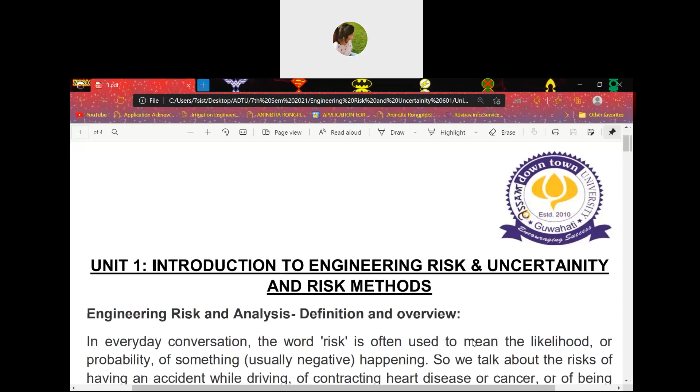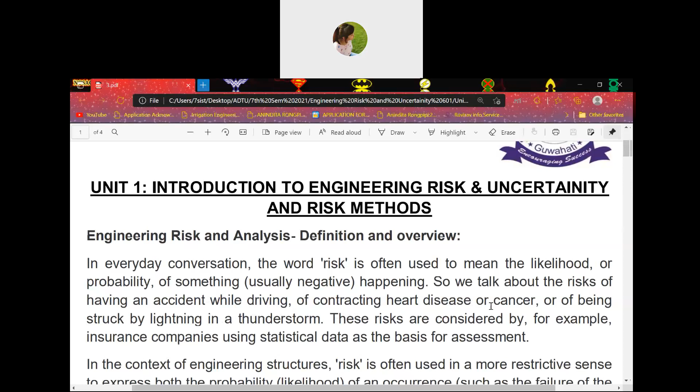In everyday conversation, the word risk is often used to mean the likelihood or probability of something negative happening. For example, the risk of having an accident while driving, of contracting heart disease or cancer, or of being struck by lightning in a thunderstorm. These are negative happenings when it comes to the word risk.

These risks are considered by, for example, insurance companies using statistical data as the basis of assessment.

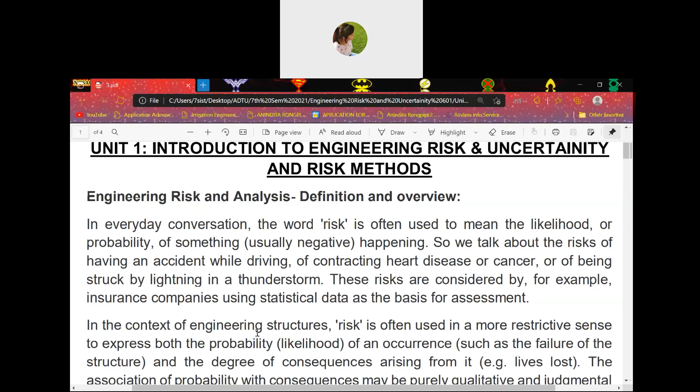In the context of engineering structures, risk is often used in a more restrictive sense to express both the probability, that is the likelihood of an occurrence such as the failure of the structure, and the degree of consequences or results arising from it, for example, lives that have been lost.

The association of probability with consequences may be purely qualitative and judgmental, using terms like high, medium, and low, and this may be useful in assessing relative risk.

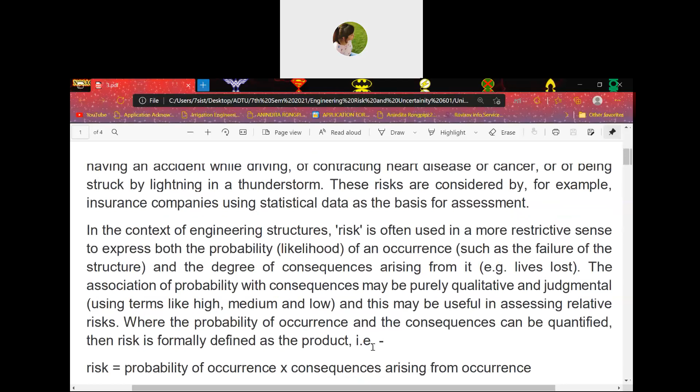Where the probability of occurrence and the consequences can be quantified, risk is formally defined as the product, that is, risk equals probability of occurrence multiplied by consequences arising from the occurrence. So, from an engineering point of view,

risk is used in a more restrictive way, to express probability, meaning likelihood, and occurrence, meaning an event that has already occurred. Here the example cited is the failure of a structure, since we are talking about engineering structures, and also the degree of consequences arising from it, that is the result of the consequences arising from the occurrence. For example, when a structure fails, the consequence is that lives are lost.

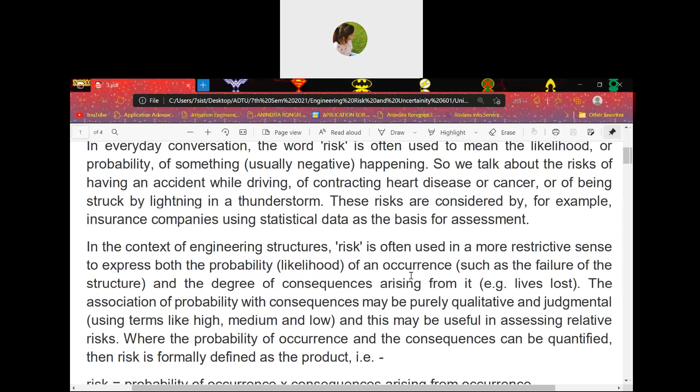So the association, that is the connection, of probability with results, that is consequences, is purely qualitative and judgmental, for we use terms like high, medium, and low. This qualitative and judgmental relation between probability and consequences is useful in assessing or determining relative risk, that is, basic risk.

Where the probability of occurrence and the consequences can be quantified, when you can quantify both the results and the occurrences that took place, risk is defined as the product, which is defined here: risk equals probability of occurrence multiplied by consequences arising from occurrence. In simple terms, risk equals occurrence multiplied by results, that is, the outcome of the occurrence.

Buildings, bridges, chemical plants, and pipelines are usually built and maintained in accordance with standards and codes of practice that aim to achieve a certain target reliability, which is the probability of not failing. We all know that when bridges, buildings, chemical plants, and pipelines are built or maintained, they follow certain standards and building codes or practices. Why are these standards there? Because they aim to achieve target reliability, meaning the chances or probability of the structure not failing.

But failure of, say, a pipeline will have very different consequences for persons if it occurs in a crowded city where people may be injured, rather than in an unpopulated desert. If a pipeline is constructed in a crowded city, a failure will result in many lives lost. But if the same pipeline is constructed in an unpopulated desert, a failure would cause no injuries since no one is there.

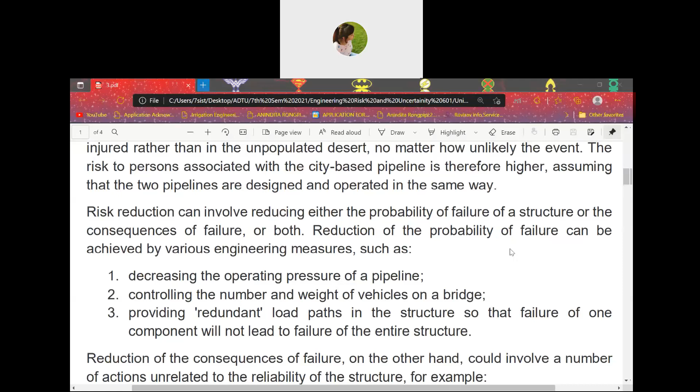Providing redundant load paths in the structure so that the failure of one component will not lead to the failure of the entire structure. Building a redundant, dummy load path in the structure means that when failure occurs in one component, the entire structure does not fail.

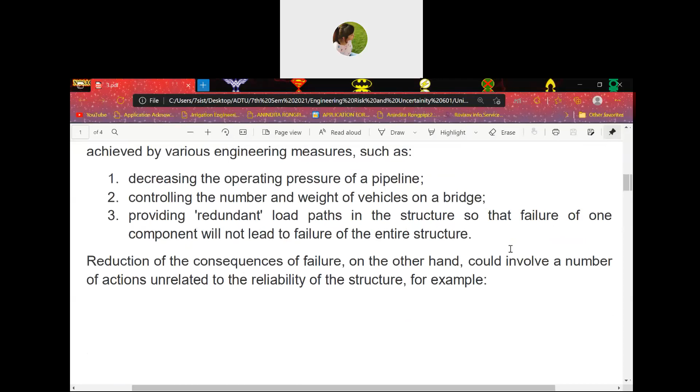Reduction of the consequences of failure, on the other hand, could involve a number of actions unrelated to the reliability of the structure.

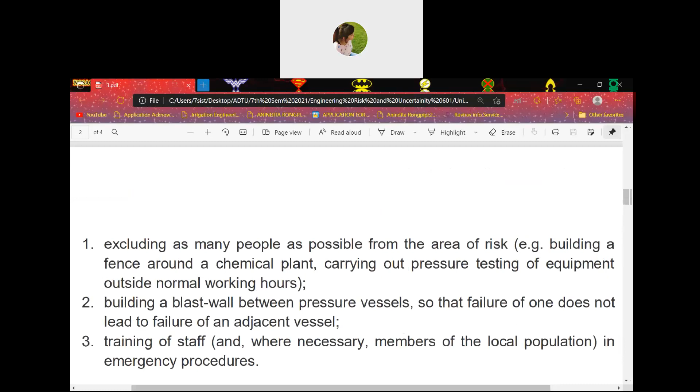For example, excluding as many people as possible from the area of risk, such as building a fence around a chemical plant, carrying out pressure testing of equipment outside normal working hours, building a blast wall between pressure vessels so that failure of one does not lead to the failure of an adjacent vessel, and training of staff, and where necessary, members of the local population, in emergency procedures.

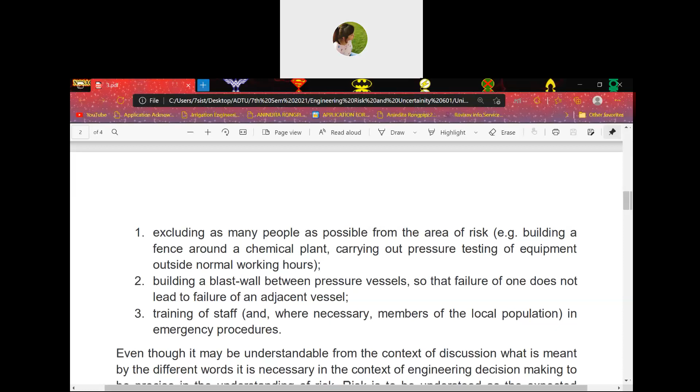Even though it may be understandable from the context of discussion what is meant by different words, it is necessary in engineering decision making to be precise in the understanding of risks. In general terms we may understand the term risk, but we should try to understand it more in the context of engineering decision making.

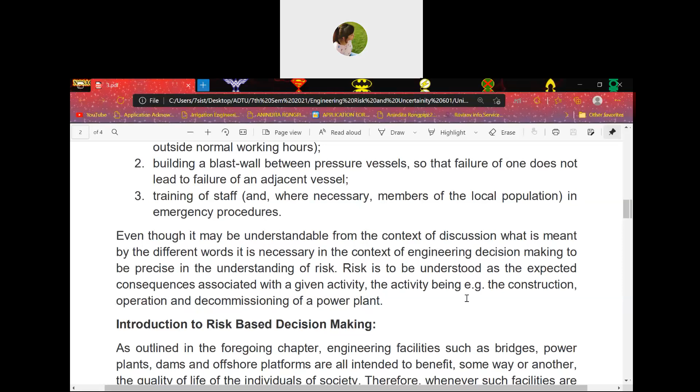Risk is to be understood as the expected consequences associated with a given activity. So how is risk understood? Risk can be understood as the expected results or consequences associated with a given activity. This activity can be a construction operation or the decommissioning of a power plant.

Next, introduction to risk-based decision making. As outlined in the previous discussions, engineering facilities such as bridges, power plants, dams, and offshore platforms are all intended to benefit in some way the quality of life of individuals of society. Therefore, whenever such facilities are planned, it is a prerequisite that the benefit of the facility can be proven considering all phases of the life of the facility, including design, manufacture, construction, operation, and eventually decommissioning.

So any engineering facility such as bridges, power plants, dams, and offshore platforms, if it is constructed, it is definitely intended for the benefit, in some way, as a contribution to the quality of life of the individuals of a society.

So when such facilities are planned or constructed, certain phases of the life of the facilities are considered. These phases include design, manufacture, construction, operation, and eventually decommissioning. If design, manufacture, construction, operation, and decommissioning are not included, then the facility should not even be established or planned.

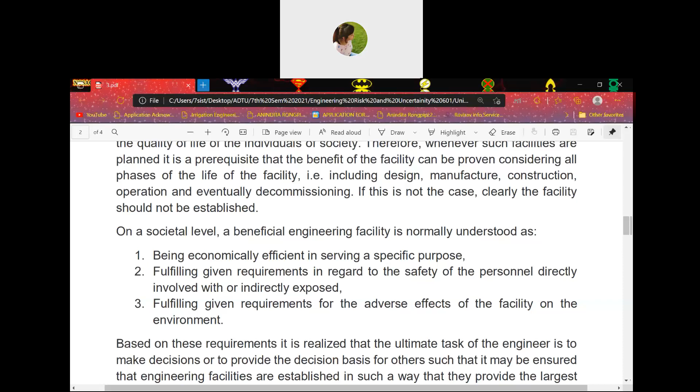It should also fulfill given requirements in regard to the safety of the personnel directly involved, and those indirectly exposed - that is, the safety of the laborers and all who are involved in the construction process - and fulfill given requirements regarding the adverse effects of the facility on the environment.

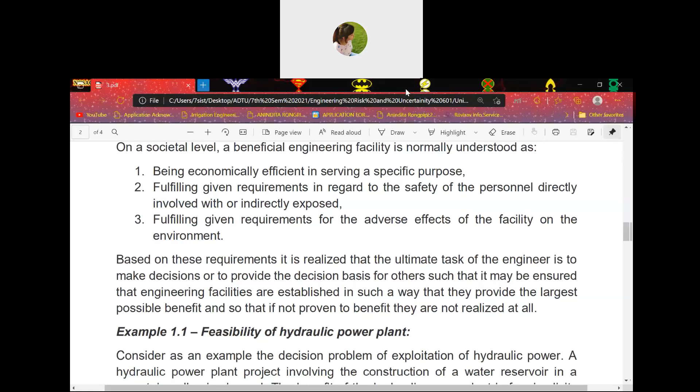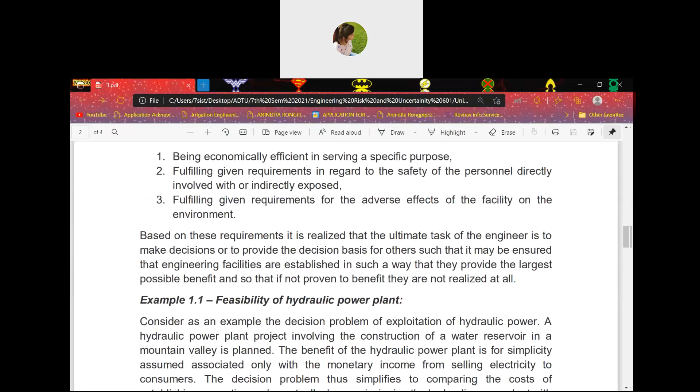Based on these requirements, it is realized that the ultimate task of an engineer is to make decisions, or to provide the decision basis for others, such that it may be ensured that engineering facilities are established in such a way that they provide the largest possible benefit, and so that if it is not proven to benefit, they are not realized at all.

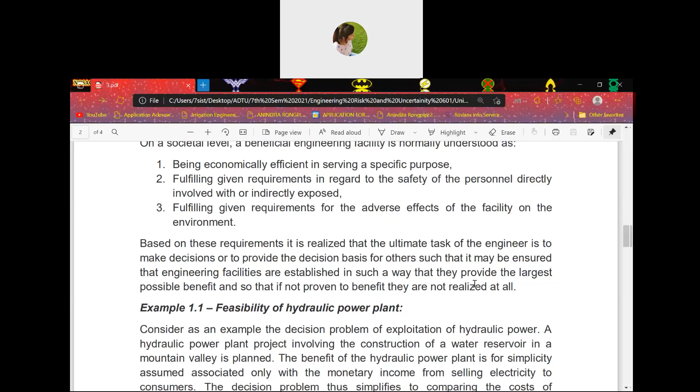Based on these three requirements, the ultimate task of any engineer is basically to make proper decisions. These decisions should mainly focus on the largest possible benefit of the facility. If the facility does not benefit, then it should not be realized by anyone. Even if it is not beneficial, it should not be realized. And if it is beneficial, then that is a very good thing.

The first example is the feasibility of a hydraulic power plant. Consider as an example the decision problem of exploitation of hydraulic power. A hydraulic power plant project involving construction of a water reservoir in a mountain valley is planned.

The benefit of the hydraulic power plant is, for simplicity, assumed to be associated only with the monetary income from selling electricity to consumers. So the decision problem thus simplifies to comparing the cost of establishing, operating, and eventually decommissioning the hydraulic power plant with the incomes to be expected during the service life of the plant.

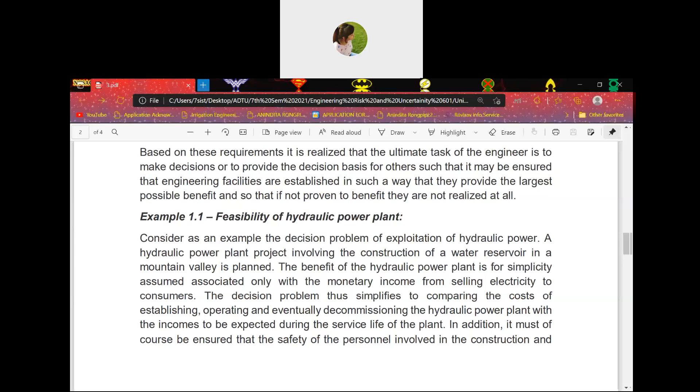The decision problem, in simple words, means to compare the cost of establishing, operating, and decommissioning the hydraulic power plant with the income you will receive during the service life of the power plant.

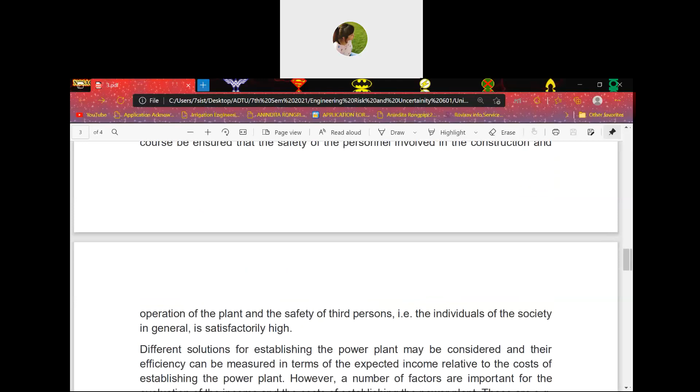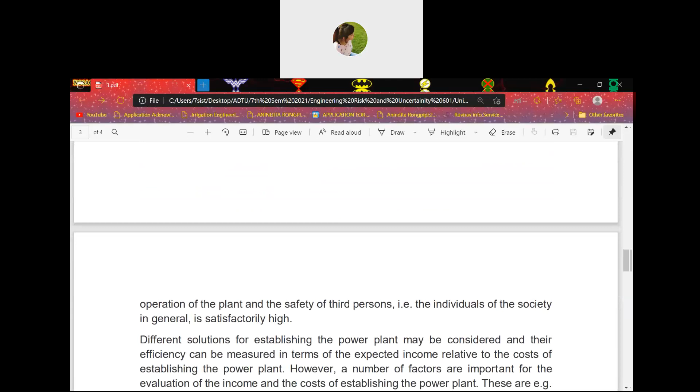In addition, it must be ensured that the safety of the persons involved in the construction and operation of the plant, and the safety of third persons, is satisfactory. The third point to consider is the safety of laborers or personnel involved in construction and operation, and also the safety of individuals of the society who live nearby, who are considered third persons.

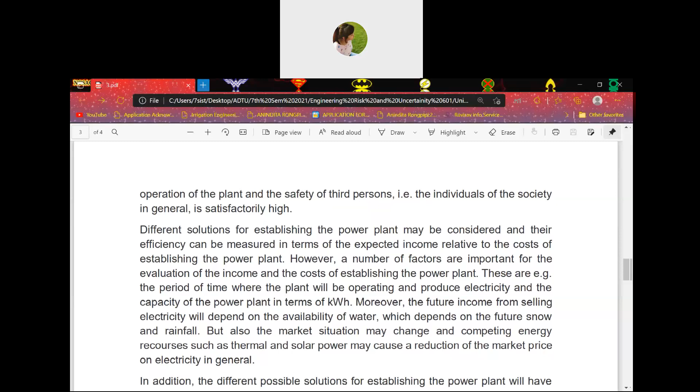Different solutions for establishing the power plant may be considered, and their efficiency can be measured in terms of the expected income relative to the cost of establishing the power plant. Efficiency may be determined in terms of the expected income or consumer income related to the cost of establishing the entire power plant.

However, a number of factors are important for the evaluation of the income and the cost of establishing the power plant. These include the period of time the plant will operate and produce electricity, and the capacity of the power plant in terms of kilowatt hours.

Moreover, the future income from selling electricity will depend on the availability of water, which in turn depends on future snow and rainfall predictions.

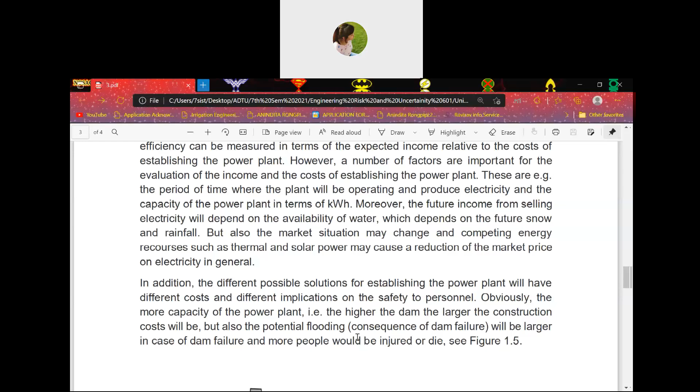The market situation may also change, and competing energy resources such as thermal and solar power may cause a reduction in the market price of electricity. These ongoing or competing energy resources, like thermal or solar power plants, may reduce the consumer price of electricity.

In addition, the different possible solutions for establishing the power plant will have different costs and different implications on the safety of the personnel.

Obviously, the more capacity the power plant has, the higher the dam, the larger the construction cost will be. But also the potential flooding consequence of dam failure will be larger. When the dam is higher and construction cost is larger, the probability of flooding as a consequence of dam failure will also be greater, and in that case more people may be injured or die.

This is the figure for 1.5, water reservoir dam for exploitation of hydraulic power, showing the dam with water reservoir and the town.

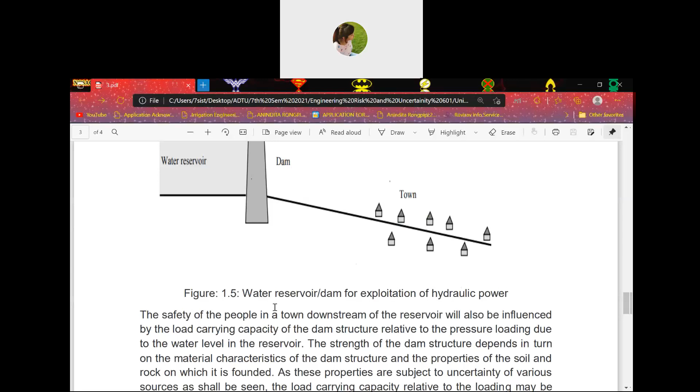The safety of the people in a town downstream of the reservoir will also be influenced by the load carrying capacity of the dam structure relative to the pressure loading due to the water level of the reservoir. If this load increases, the dam may not be able to bear it, so load carrying capacity is very important.

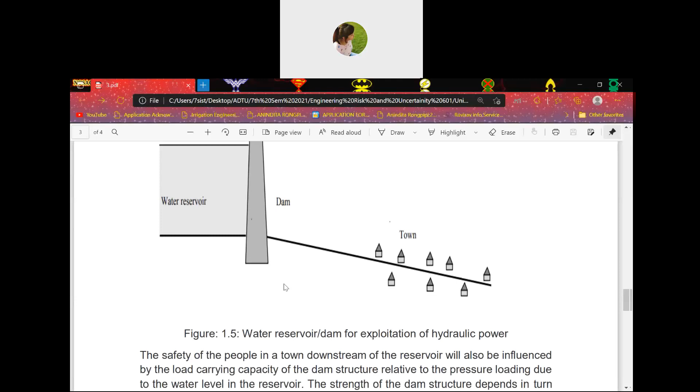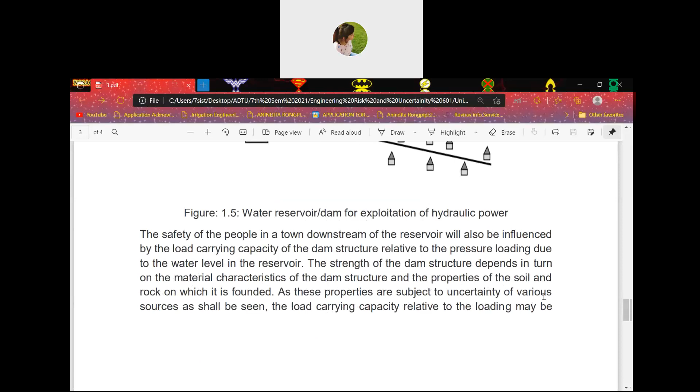The strength of the dam structure depends on the material characteristics of the dam and the properties of the soil and rock on which it is founded. As these properties are subject to uncertainty from various sources, the load carrying capacity relative to the loading may be expressed in terms of probability that the loading will exceed the load carrying capacity. Finally, the environmental impact of the power plant will depend on the water level in the reservoir.